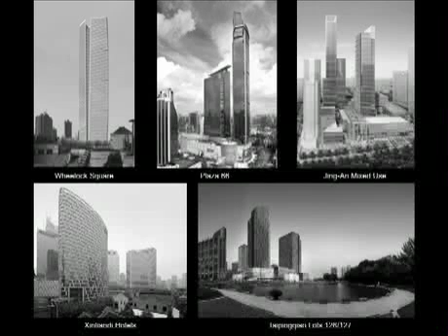And this represents, by the way, a smattering of projects that KPF has planned and built in Puxi, in this older part of Shanghai. So one of the reasons I say this is the antithesis is that as Bill described Pudong as a place where high-rise buildings are coming out of the ground as master planned, but surrounded by very large void spaces, parks, roads, open areas which perhaps eventually could be filled in, in Puxi the entire older city is filled in with a fabric of initially many, many row houses and office buildings which went up perhaps typically to 8 stories or so, with very narrow roads.

And now it is being, or has been for the past 15, 20 years, retrofitted, modernized, and redeveloped as a place where high-rise buildings can fill in the cracks or find places where tall, even more dense, modern office, residential, and hotel commercial buildings can find a home. And this shows you an image probably from the 1970s or so of Pudong over on the right-hand side in green, almost looking like an agricultural area, which in fact it was, peppered with warehouses. And on the left-hand side, you see the different patchworks of districts of Shanghai.

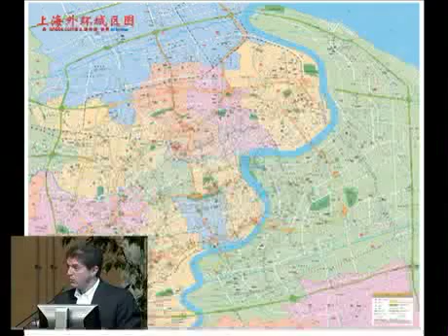Now, of course, although Shanghai was a fishing village for a number of centuries, the modern city is not really a Chinese city. It's an international city of concessions that were rising from the colonial presence of various, mostly Western powers, and then the Japanese as well. So a French concession, German concession, Russian concession, American, Japanese, and then one international. And so this patchwork gives a very interesting kind of multi-city form to the plan. And then you see further how it develops at the smaller scale.

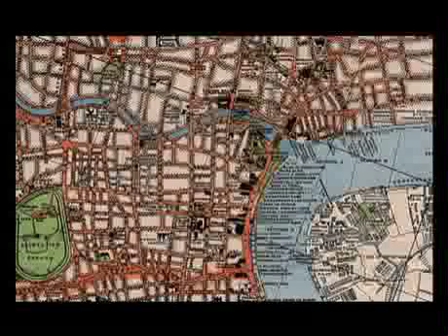There is a randomness, there is a circumstantial kind of twisting and turning of roads, and part of this comes from the natural occurrence of the Huangpu River, which you see a big wide elbow of on the right-hand side, but then the Suzhou Creek, which winds its way back towards the western part of the city. So this very organic plan of patchworks. And as I was thinking about how one could describe the way the new high-rise buildings came to be in Puxi, it is a little bit like the growth of a weed out of pavement. There were not, so to speak, very regimented master plans. There was a city master plan, but it's had many generations. Instead, it's been much more happenstance and circumstantial.

Which moneyed developers managed to get a hold of which sites through some kind of political process, along with, obviously, the power of money? Where were they able to remove the inhabitants? Because resettlement is one of the big costs, which is an impediment to building. Where were the shadow laws, which govern or safeguard the welfare of those living in surrounding residential neighborhoods, configured in such a way that one could put up a tall tower? So it has been very much like weeds growing out of pavement. In this patchwork, we find sprinkles of tall buildings.

And the first project which we did in China, and this came as a precursor to the Mori Tower, starting in 1994 as a competition, is the first project I want to talk about, Plaza 66. It is, as you can see, located in the center of a red circle, which is along a very important road in Shanghai called Nanjing Road West, Nanjing Xilu, which is the most traveled commercial road in China, the highest footfall if you measured the number of bicycles, people, cars, shoppers in a very dense city in a country full of big cities. This is the densest.

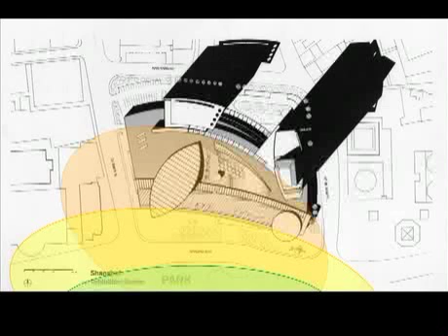And if one looked then at the plan of the building with the large public spaces of the market shown here in this iris, here in this cone, and then connected by this arc with the towers behind, those forms and the form of the front facade of the building created a sense of space, which gestured towards a park on the other side of the street.

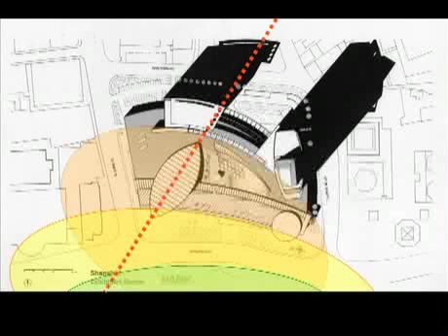And the axial opening, which was visually experienced from inside this atrium space, focused one on the Shanghai Exhibition Center, which is a building which was bestowed upon the Shanghainese Chinese government by the Russians in the period when the two countries were closely allied with each other, and one of the few open spaces in this neighborhood of the Jing'an district. And so this was sort of the focus of these spatial forms of the circular sculpting of the towers and the podium.

Then down at the base of the building, we decided that the facade along Nanjing Road would best be created as a masonry facade with a great deal of gravity, density, texture. The stone which clads the building, I'll show you in a minute, is made of a rough tooled, grooved stone almost treated as if a sculptor's chisel was giving it some form, because the vibrance of Nanjing Road in the other parts of the city has always had something to do with the way that facades take light, throw shadow, and then are repositories for signage.

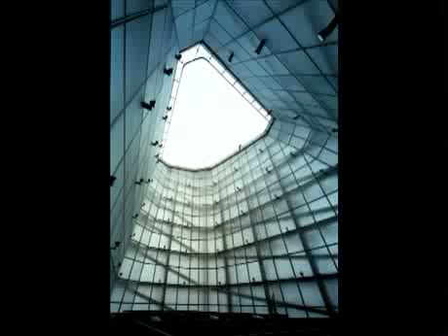At the top of the building is another space which unfortunately is not occupied. It would have been nice to make it, so you have to clamber up there, and I had to do a little bit of mountain climbing to get up on top of a cooling tower to take the photograph.

But it's the internal shroud of the lantern, and this is what I described as a series of arced shields coming together to make this unusual sort of polygonal sleeve. But it's interesting because although it funnels the plume of the cooling towers, the mechanical system of the building, the main purpose is maybe the world's largest light fixture. It's maybe 130 feet tall, and its main function is to light up at night.

But the power of the symbolism, or the power of at least the phenomenon of something that is that present and that unusual on the skyline, has made this building something of a favorite in Shanghai. Down at the base of the building, other transformations or other uses of glass in textured tiles, in translucent ceiling forms, and then as a kind of a vitrine surface to cloak stone behind. That glassiness is explored in ways that make some interesting spaces.

The plan of the main tower, and I'm sorry I don't have so many plans and sections to show today, I just haven't included them. But this one's important to show you how huge those columns are. And you can see the columns are the same size as the elevators. That's not quite normal in our practice here in this country. This is not even a super high-rise building. It's sort of a high-rise.

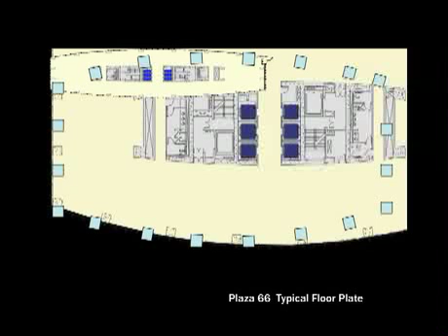But the concrete strength at that time, when the building was built in the early mid-90s, was maybe about half the strength of what we might expect today. And so in order to hold up a building like this, a tremendous amount of structure was required. And in that structural challenge also, the making of the foundation was an epic in itself. The structure here designed by Thornton Tomasetti, one of our great New York engineers. Dennis Poon was the leader of this design along with Richard Tomasetti.

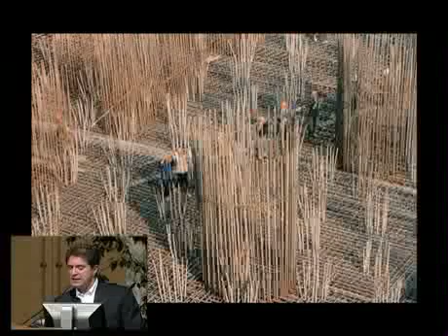But you can see here the reinforcing bar is so densely packed in this place where first the piles and then the floor slabs had been poured for the basement, that there's almost not enough room for the concrete. And that's because the reinforcing bar was locally procured. It was a very weak steel, and so you needed to have more of it. It actually became more expensive than if you had imported more efficient steel, just because of the quantities involved.

So it took on, as we would go and inspect the site, almost an agricultural character. This was like looking at a Bruegel painting of wheat fields with the farmers tilling, collecting the sheaves of wheat. Only it was a high-rise in modern China. Very much a pioneering building from a structural point of view.

The stiffness ratio, which is one of the criteria for design of a tower, regulates the degree to which it would sway in the wind, in particular more than earthquakes. The Chinese codes were very conservative because these buildings had not been done before. This was the tallest building by far in Shanghai. And so conservatism is a natural response when building something which otherwise could be quite risky.

So what Dennis Poon had to do was to give a whole series of academic lectures to the experts panels in Shanghai to explain to them why the building should be able to oscillate or to sway more than 1/800th of its height. 1/500th would be sufficient to ensure comfort inside and safety outside. And that was a long-fought battle, but referring to Bill's comment about embedded energy, saving material in a high-rise, of course, is in the interest of the economics of the building, but it's also in favor of good environmental practice: less concrete, less material, less curing, and a lower carbon footprint.

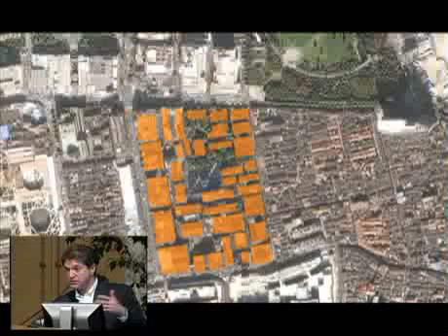It's a very different urban structure from what we're used to in the Western city, and saying something about a social and economic and a development culture that existed when these concessions were built primarily, let's say the end of 19th and early 20th century.

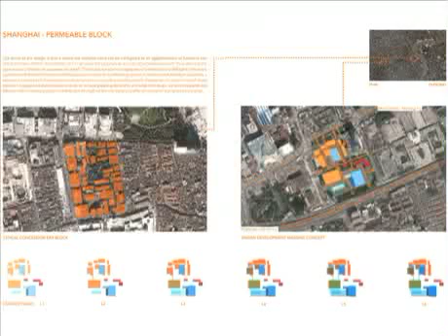So this second project, the Jing'an project, works under the assumption that the worst thing one can do... put it another way, one of the responsibilities of the architect today in Puxi is to try to either preserve, mimic, reiterate, echo something of those lilong block structures that we know from the concession era, because they give life to the city, because they're interesting, because today's formula of many a Hong Kong developer coming to Shanghai, or many a Chinese developer, to build a big podium that engulfs an entire superblock, and then a tower, and a tower, and a tower, leaves something to be desired. The city ceases to operate in the sense that public space, outdoor space, has been erased and engulfed by private property.

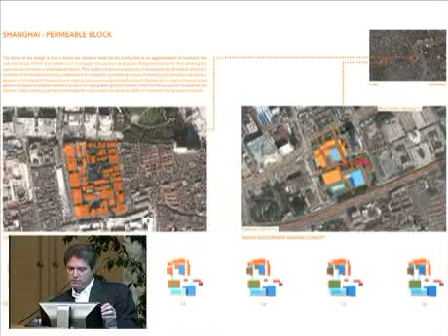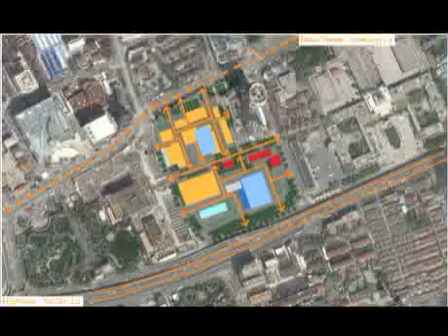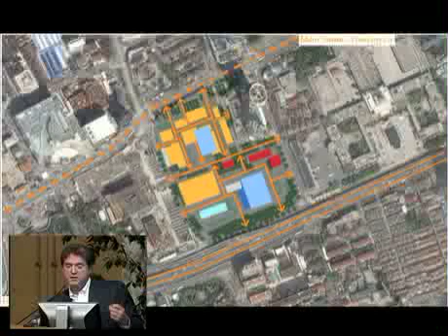So this sort of bit of very fine definition of smaller mini blocks and pathways became the paradigm for the plan of this Jing'an project. This could have been a super block, could have been one giant podium, and instead you see a mixed-use amalgam of taller towers in light blue, lower retail areas in yellow, public transportation, entertainment in red, and main sort of objective here, first objective, was to keep the public space of the street moving through the project.

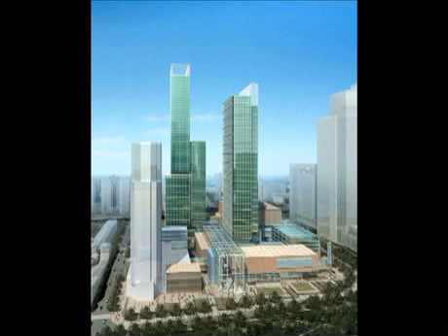And it shows you an early rendering of the project with these two towers, one being initially a pure hotel, the other being a stacking of an office building below, becoming a more slender building above. Office below and hotel above. And then in the sort of boxes and cubes at the base of the building, which you see rendered in more solid materials, places to shop, places to eat, to be entertained, and some public transport spaces, function rooms, etc.

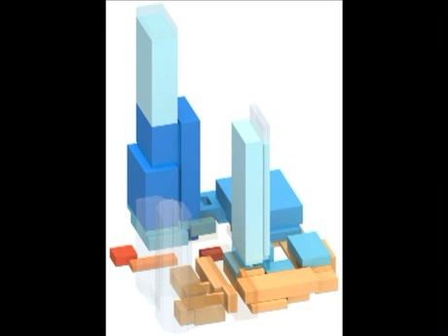Now this kind of language then of cubes, a bit sort of a complement to the curves which I showed you in Plaza 66, makes a kind of system for the development of this project and a way in which we like to view the city and give it some kind of recurring theme of the way in which elements of building and function are recognized. And those, in fact, could be pulled apart into a catalog.

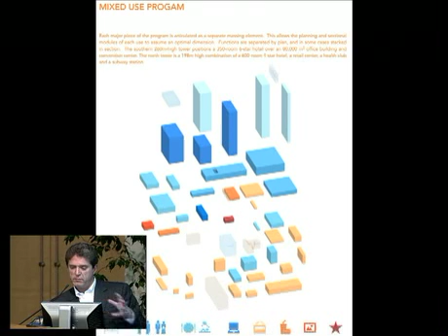One very nice thing about this approach of this grouping of many different grids and solid volumes is that given the mixed use of the project, we could suit the dimensions of the office building, the 40-foot corridor perimeter, or the hotel dimension, or the broader convention element, or whatever the function might be. So the free collaging of these pieces and the sort of compositional arrangement of them suited the purposes of the mixed-use plan. Now, another aspect of the project which was very important to draw out from this approach was the categorizing or the hierarchy of vertical scales in the city.

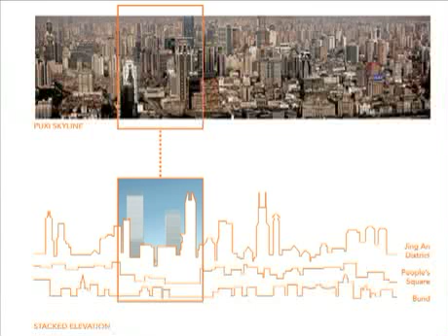Puxi and Shanghai can be seen as a progressive layering of scales, starting at the river, at the Huangpu River. Most of you know the view of the Bund with limestone buildings which hit a datum line, not consistent, but somewhere around 50 meters. Then working up in tiers to buildings which historically were erected a little later, which are perhaps 30, 40 meters taller, then middle high-rise buildings up at about 120 meters, and then finally the datum which describes the high-rises of today in Puxi, which top out at about 280 to 300 meters. So there's this progressive layering in the city. You could see it in this image taken probably from the Pearl Tower with a telephoto lens.

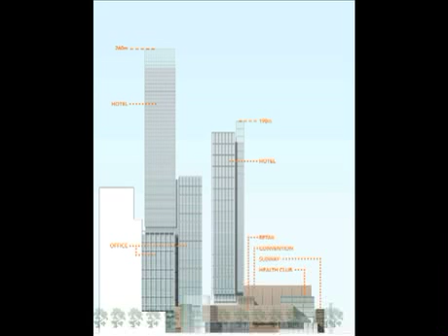And then that same sort of tiered scaling up from low to high is inherent in the Nanjing Xilu Jing'an project. So one of the possibilities in a high-rise, but not always achieved, is to connect the earth to the sky in some way that gives us a scalar clue. It's not a sudden transition.

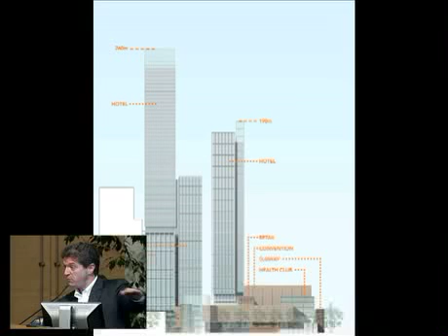It's not an infinite kind of juxtaposition of 0 to infinity, but rather it's an incremental approach of 0 to 25 meters, which, by the way, the fire departments in Shanghai give as the first podium level datum that has to be observed for most of the podium. The firemen actually have to get up on ladders to the podium roof. So that's our first clue.

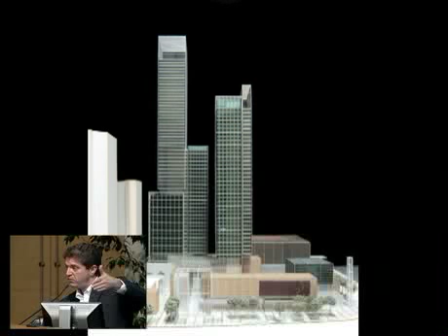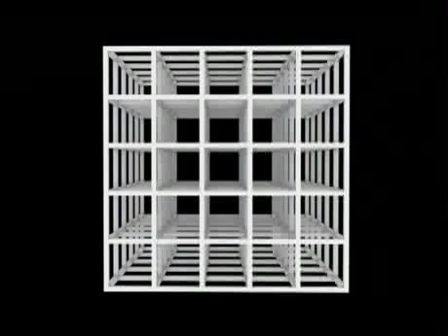So now the purity or the perfection of a grid, which does not exist in the overall composition, is something we do bring in this project to every piece of the building. So we recall here the Sol LeWitt cube sculpture, because there is something, I think, for us New Yorkers inherently urban about the grid. Of course, Cartesian grids started somewhere else in the world, but we've found a way in the U.S. to make them the kind of underpinning of our cities, and they serve us very well.

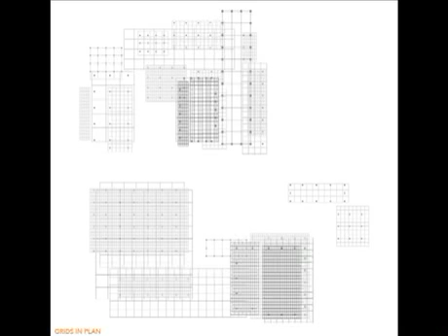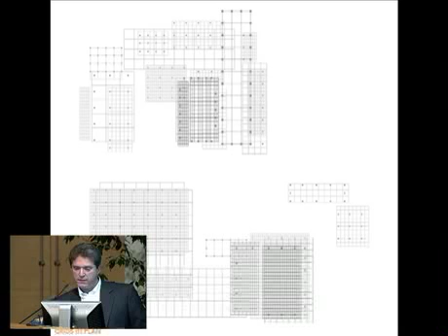There's a flexibility in the grid, and there's almost, for this project, a kind of religion that we have to stick with the grid. Nothing falls off line, because within this compositional chaos, there must be some system. And then it all works very well, because column lines and facades and pathways and parking all work. So this is the closest thing I'll show you tonight of a plan of the building, which looks like a series of patterns. But it is a kind of informed set of orders, which then generate the column lines and the spaces and modules and so on.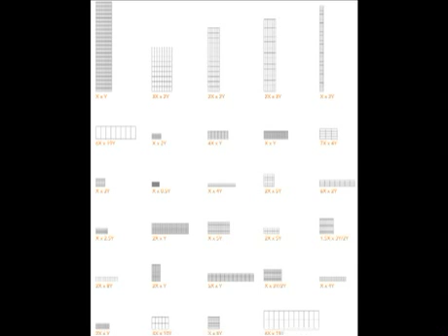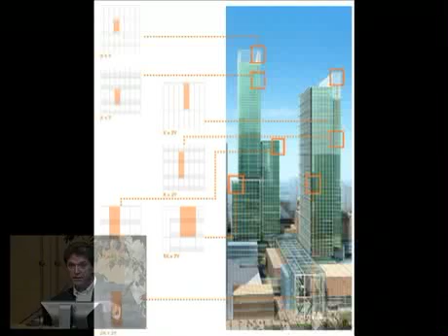And then in the facades, partly for the sake of compositional efficiency and partly for the sake of cost, and maybe for the efficiency of the use of materials, each of the facades falls along the pattern of a number of modules which are multiples of each other, so they meet in a clean fashion. There is a kind of rhyme and reason to the way that structure and facade work together in a whole catalog of many pieces of the building. And you can see here how that catalog, as a form of patchwork, relates to different pieces of this glass wall facade.

By the way, talking about the use of glass, the use of solid, which is a subject of a long lecture, and I'm almost done here, so I won't get too far into it, but I think we all appreciate the beauty and lightness of glass and the function inside a building of having a lot of light. And yet, for a city to be all glass leaves something to be desired. So in Shanghai, there is now a backlash against the use of glass. There are regulations which prevent one from using either too much glass or glass with too much reflectivity.

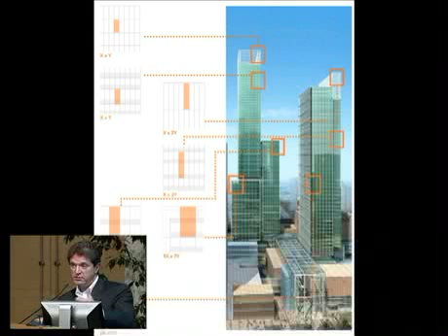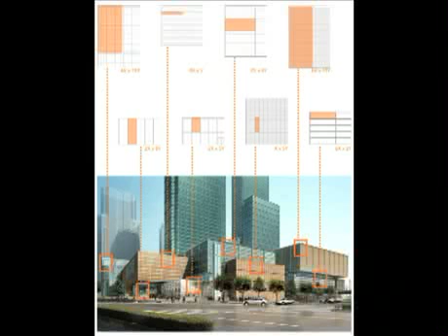So the use of the grid at this point is to provide, in some cases, a metal veil which is placed over the glass as an exoskeleton or a scrim or a cage to soften the appearance of the glass and to keep those reflections from being too harsh. And then down at the base, we revert from the glass to solid materials of terracotta, of metals, stone. And one piece of the building is a store, which is just a perfect grid. So that is our Sol LeWitt.

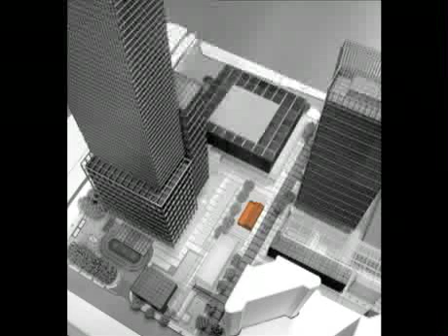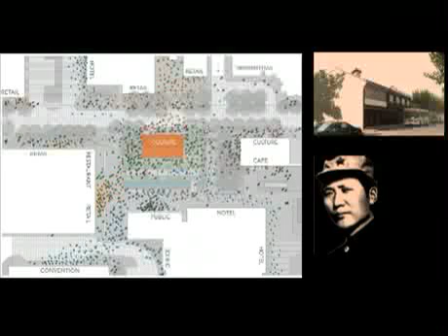So to finish up, one last and curious and interesting fact of the project is that in the middle sits what you see here shown as a colored little Monopoly house. That's a house where Mao Zedong lived as a young man. And so at the core of this sort of Rockefeller Center is the house where the great leader lived. And the Hong Kong developer impresario Robert Kwok, Shangri-La, can see his great monuments of commerce go up. They're all, in a sense, in service to this landmark.

And this would be the equivalent, let's say, of the skating rink in Rockefeller Center. And it'll be very interesting to see. We don't know how it's going to be used. For Mao's calligraphy, an exhibit? Will it be a tea house? Will it be full of tchotchkes of Mao watches? We're not quite sure. More important for us is to understand the way people will interact with the scale of space, the scale of these boxes that ascend up again from the ground to the 280 meters to make a town square in the middle of Shanghai.